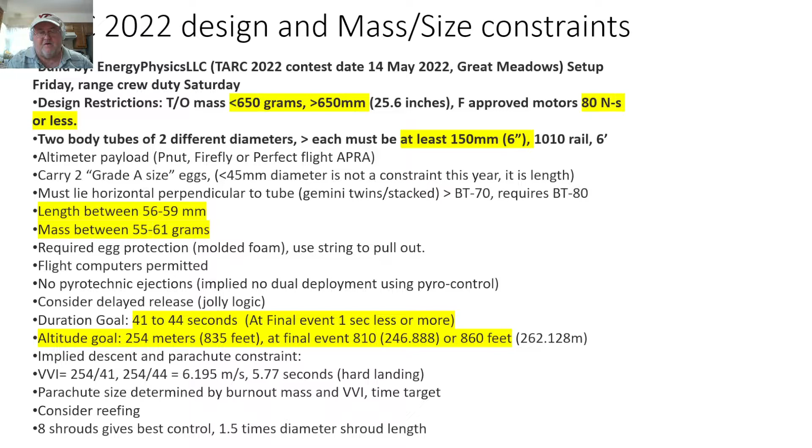Consider reefing your parachute as you dial the altitude in and get the same distance to the ground. I'd recommend using 8 shroud lines, which give you the best control, typically 1.5 times the diameter. This is always a subject for debate, and there are many NAR research papers on this. So look at the NAR websites to see what previous researchers say about how many shrouds and what the length should be - that's typical.

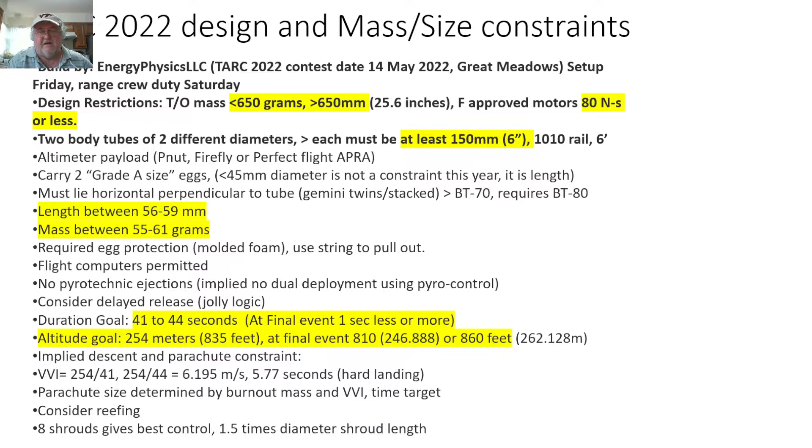So I'm going to base the TARC that I'm building, again for educational and demonstration purposes, off of a project that I did in 1974 at school, in my sophomore year I think, in high school, for the science fair. I think it took 3rd place, which was kind of fun.

Anyway, that rocket was made out of paper towel rolls, and the adapter was hand carved so that I could get down to a BT-55 payload, which carried at that time a Transroc electronics receiver, which transmitted the rocket's position.

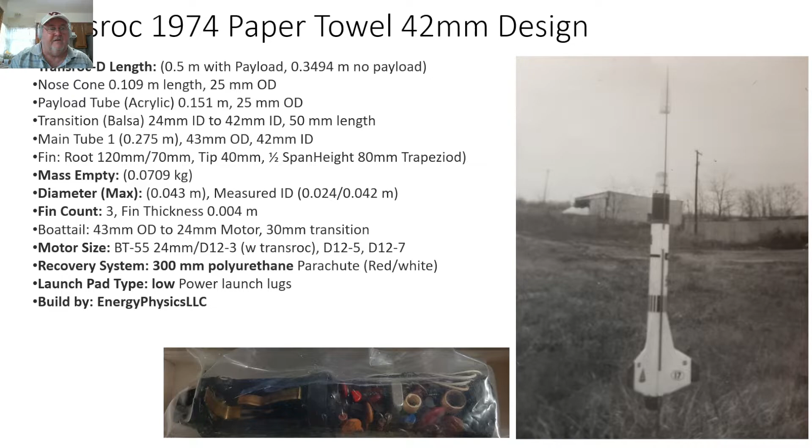The state-of-the-art available, the equivalent of your flight computer today. We just didn't have as much information, guidance, or teachers that could help us be mentors in how to do all that. Just kind of had to entirely figure it out.

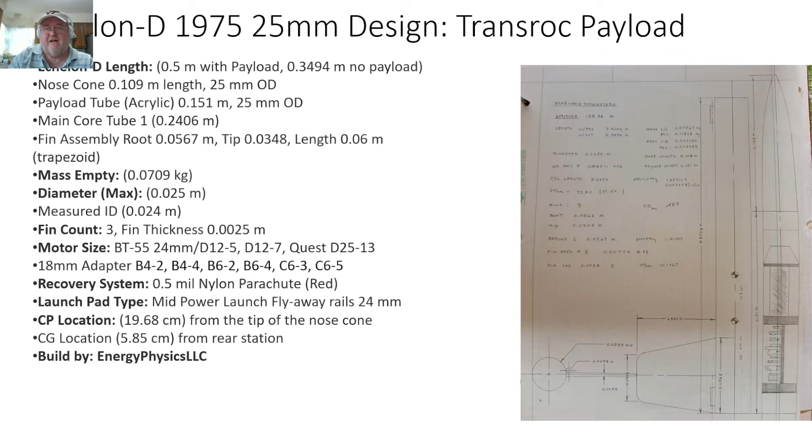So the second system that I based today's design on was the second one I did of this series, the Transroc series, which the Echelon-D I designed in 1975. That was for a higher altitude, 25 millimeter, again carrying a Transroc payload. I never built this because at the time I was entering Virginia Tech, 75 was my last high school. So I took this information and computed rocket altitude calculations and did a whole series of calculations and mathematics that helped me hone my aerospace engineering, determine the drag, the CD coefficients, all that.

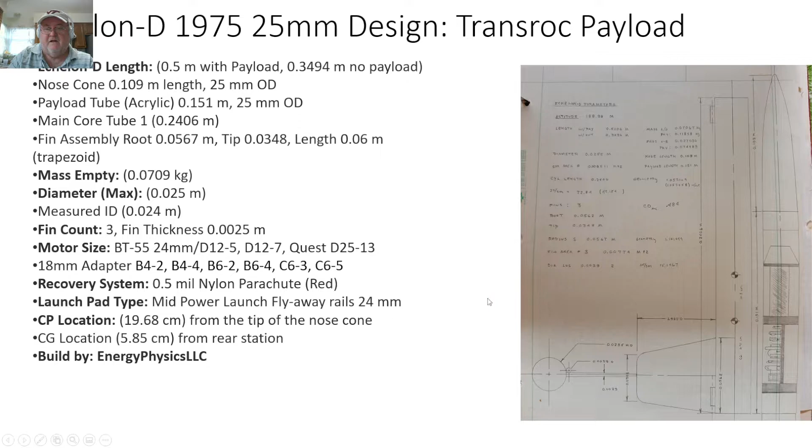Senior in high school, that's when I went to science fair, modeling a spacecraft recovery. Again, I didn't have a lot of help except for my teacher, Mary Hayes, professor. She really encouraged me.

So let's get up to date here. I would recommend that you first look at your overall constraints and put those into a modeling system. Either use Fusion 360, or I'd recommend that you use an online version of SolidWorks, which is Onshape. Then put your basic rocket components into that. The reason you're going to do that is not only to get an assessment of how the components fit together and the sizes and shapes that you're going to use that will equate to stuff that you can buy as an independent parts kit, but you may want to then PLA print or laser cut these components once you're done. This is the modeling system you're going to have in order to make the 3D printing or the laser cutting possible. So go ahead and get your modeling done first.

There are 2 ways to attack this problem. One is you could just go out and grab a bunch of kit material, throw it together with the basics of what you know, and go out and fly it right away. Iterate through that process, hit and miss until you get the right altitude and right engine selection. I would personally recommend that you go ahead and do that right away, just build one and fly it. But once you've done that and learned from those mistakes, hopefully you'll come back and realize that a design process is far more important.

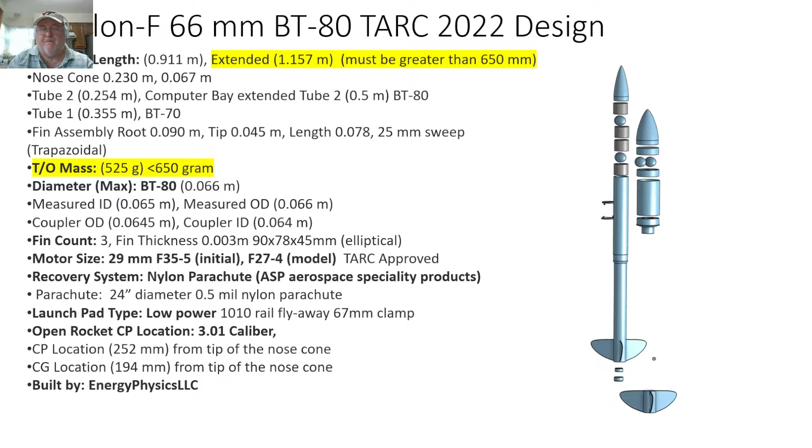The next thing you should do is a real quick simulation to test and determine your motor sizes. A typical tool for this that's free is called Open Rocket, and I recommend you download that. Also buy a commercial version of that from Apogee Components called RockSim. Both systems, in my opinion, are extremely powerful and allow you to do basically everything you need to do: what size engines you need, what your weight is going to be, how long the rocket is - all these basic parameters that you can mix and match and change before you even do a single bit of gluing or shaping or cutting.

Designing is really important at this stage to look at all your options, basically to bound the kind of rocket you're building. You can see from this particular design I've shortened the components from the original Onshape model, just to see how short and how small I could build one of these rockets. Again, I chose a 29mm tube and then another version with a 24mm tube. Each of those required different engines and went to the same altitude, 254 meters. You just keep adjusting the mass balance that you put up front until you hit that altitude, and you hit those numbers in terms of durations and parachute sizes. It's just a modeling iteration process, typically.

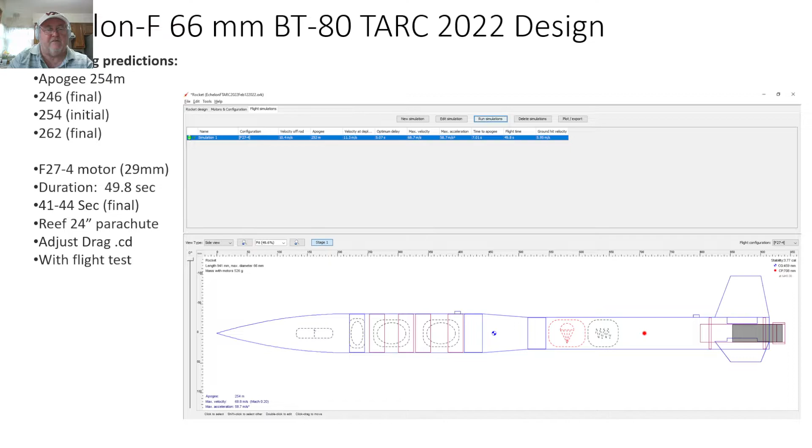This is a printout of that, showing basically your altitude, your vertical velocity, and your acceleration, and other components based on what you're looking at, like how much wind drift you have. I make a recommendation that you look at wind. One of the key factors in loss of TARC rockets is putting them up so high and then dealing with high winds, and then you lose sight of your rocket. It just goes out of sight and hangs up in the trees. So you need to calculate those wind drifts and estimate how far it's going to drift every launch. You can use this simulation to do that. That way you'll increase your chances of recovering it, since losing it is really a financial loss - it's not a safety issue as much as a loss of time and money to not be able to recover the rocket.

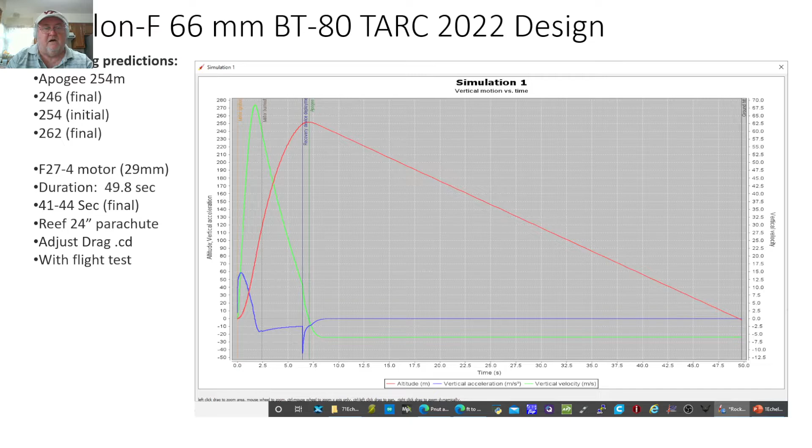This is another style that you'll see a lot, with a bullet nose cone and even the soft TARC-type nose cone. It's a foam nose cone to give it some cushioning, because the nose cone is going to be the first thing likely to hit the ground based on how you've set up your shock cord recovery. Also with a 29 millimeter motor, an F27-4 is what turns out to be the type of motor needed to hit exactly the target.

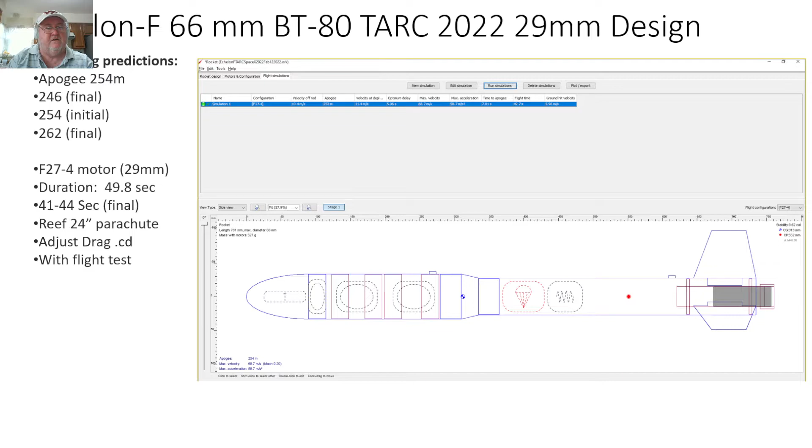And another picture of that altitude prediction. Then a couple changes - in this case, going down to a 24 millimeter motor makes it a little bit lighter and cheaper. So don't be hesitant to go down to a 24 millimeter design, because you can get more launches. Motors are cheaper and they still reach the same altitudes and the same durations. So that's, again, a design decision that you and your whole team need to make. Team meeting.

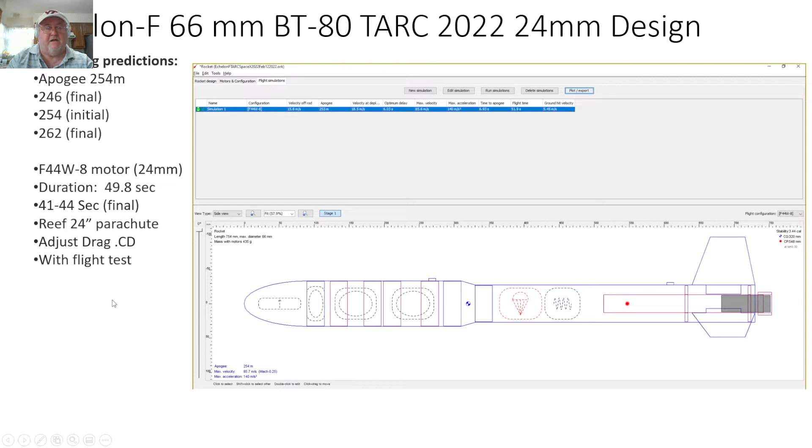So just one quick review - last year's designs were typically like this. They were all either BT-70 tube sizes or BT-80 tube sizes. Those tend to be the two most popular. And they only had to carry one egg, and it was a vertical egg. I just want to caution you, don't order that vertical egg container from Apogee Components - make sure you get the horizontal one instead. So be careful about which one you get, so you don't get the wrong one.

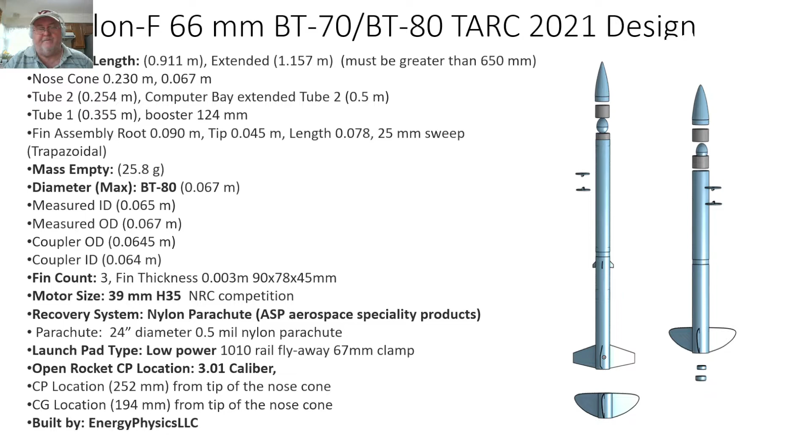These are the 2021 design parameters. Let's just go through them quickly. So let's talk about fins for a second.

Basically, you can still use balsa as long as you strengthen it a little bit and make a fit through the tube fin tab design. It'll probably need to be somewhere between 3 and 4 millimeters in thickness. You want to use either wood glues, which work real good with balsa and paper, or even epoxy, which I'd usually recommend as a stronger material, especially if you change to a fiberglass fin or laser cut your fin.

Typically, using a through-the-fin type of design is better. It stands up to the motor stress and it'll last longer. I usually recommend coming up with innovative ways of making these fins removable. A removable component allows you to replace broken parts, less stress on the rocket, carrying fewer components, and quicker turnaround.

One way to do that is to PLA print a fin container, or fin can, which is a smaller tube that goes outside the body tube. Then you PLA print various fin holders and even pop rivet those, or use cap nut screws, bolts, whatever attachment you want. Or again, you can just glue them and cut off any that break.

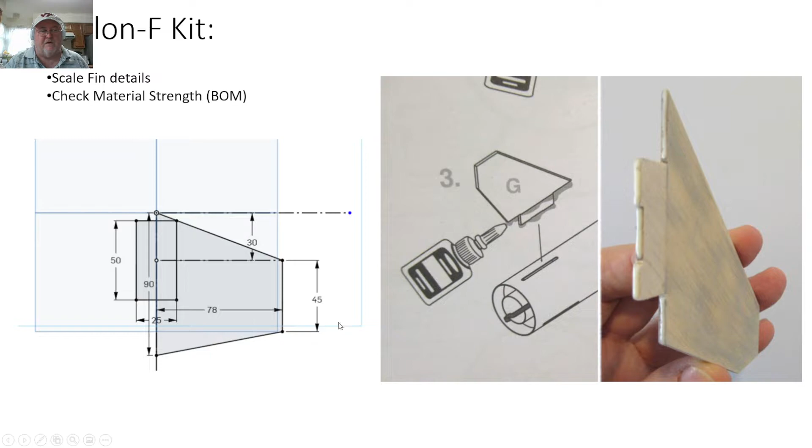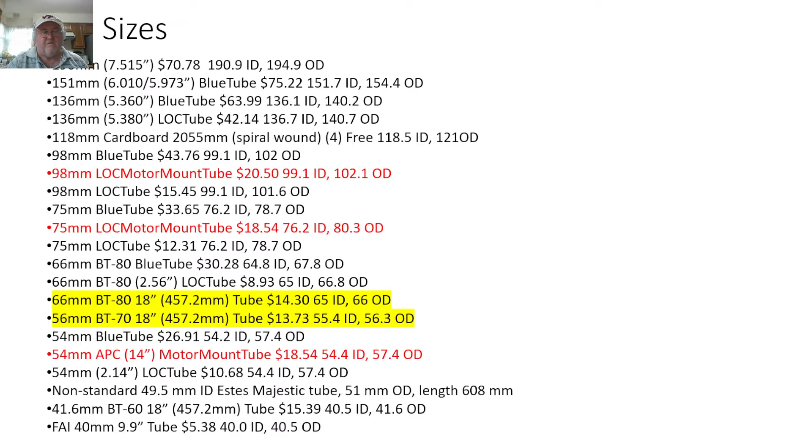Once you have your designs and simulations done, start sourcing out various body tubes and costs. Put all that into a list. Don't buy it right away, just make a big list of all the stuff you have, and make a source list of who you can buy it from and what it's going to cost.

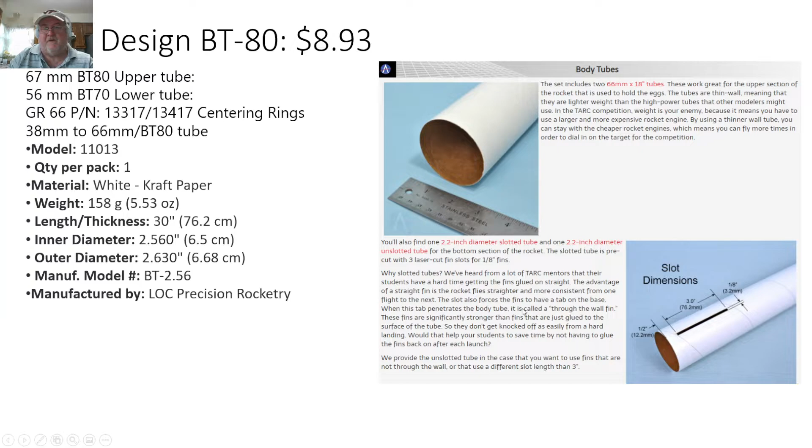You're going to have to do this with a real job, and the process is important. Put that in your marketing video and explain how you went through all that. That impresses the judges, they understand you're doing this as if you were doing a real job at SpaceX, ULA, Rocketdyne, or Electron. So I highly recommend you document your process, costs, and expenditures, how you ordered and who you ordered from.

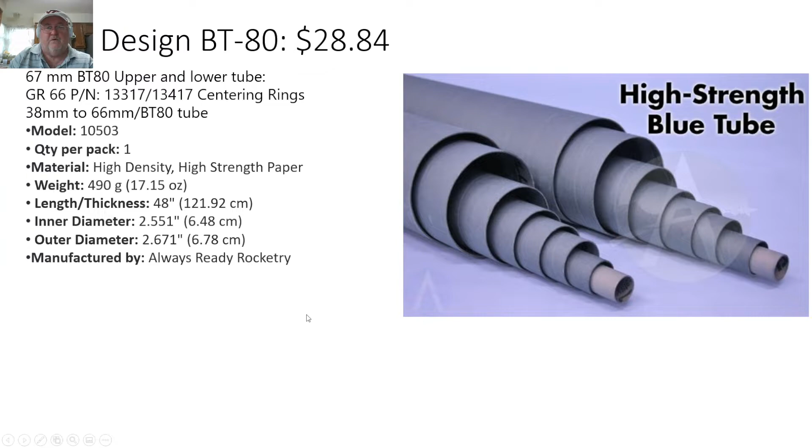Body tubes are important because they determine the strength of the rocket. You can use fiberglass, but cardboard or phenolic tubes work just fine as well.

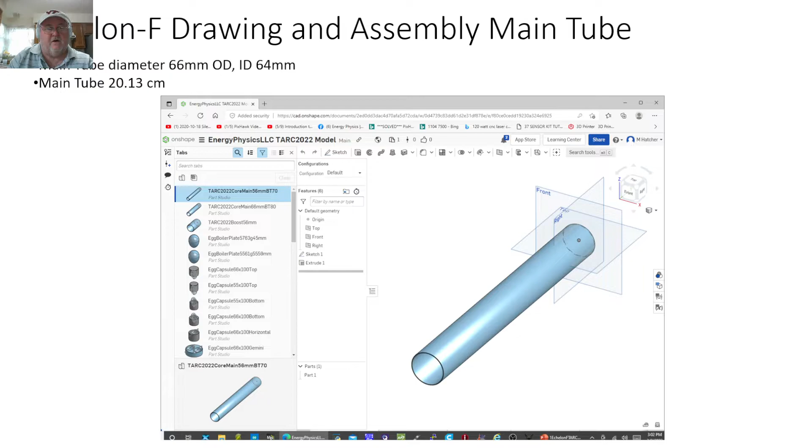Once you've decided on the overall design, go back and change your model so that you can do the CNC cutting or laser cutting of anything, especially motor mounts, tubes, capsules, or special cut bulkheads that you can CNC later.

Each of the couplers is important. It depends on how you want to separate your rocket, whether you have a solid coupler or an open coupler. Again, it's a design decision to make. Considering you only have a certain amount of ejection charge, the longer that tube is, the harder it is to pressurize all that volume. But typically, a smaller rocket is better than a longer, higher volume rocket with an open tube.

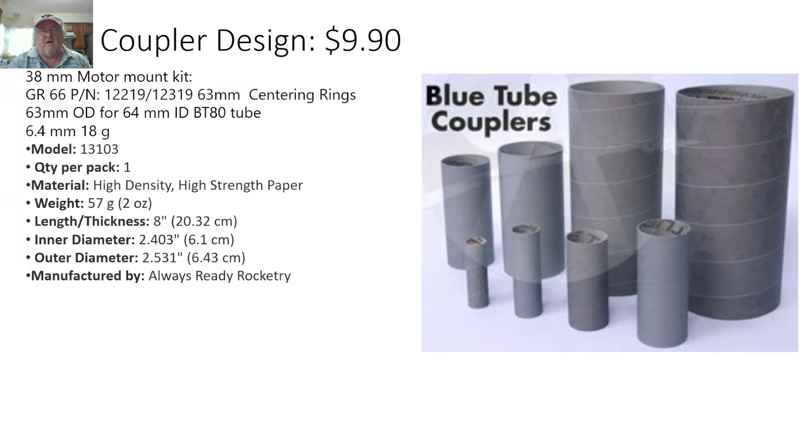Another way to close that down is to use a solid tube coupler that you can purchase, or you can PLA print your own. I recommend that, because you'll learn more if you learn to PLA print your own materials and do your own design.

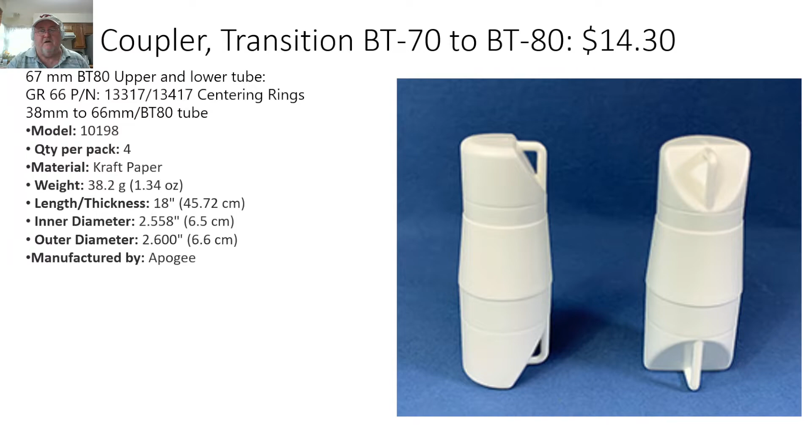Typically, the rockets built by level 1, level 2, and level 3 rocket certifications use hobby plywood just for strength. But if you combine fiberglass and PLA together in a layered approach, you can typically get even better strength-to-weight ratios, because plywood is just glued. You can use carbon fiber and layer, or fiberglass and layer with epoxy, putting a thin layer of plywood, foam, or PLA printed material, whatever layers you want, as you get more sophisticated in how you build these electronics bays, couplers, and fins.

You can purchase these bulkhead designs, and I recommend you take a look at piston ejection systems that prevent you from burning up your electronics. That's one way to do it. Another is burn cloth, a Nomex cloth that you wrap around your parachute, as another recovery system.

Take a look at multiple ways of recovering the rocket and preventing the ejection charge from burning essential components. After a while, catastrophic burns and catastrophic failures occur. Things get heated up, and you'll find that your rocket will last maybe 10 to 15 launches before things start falling apart or breaking.

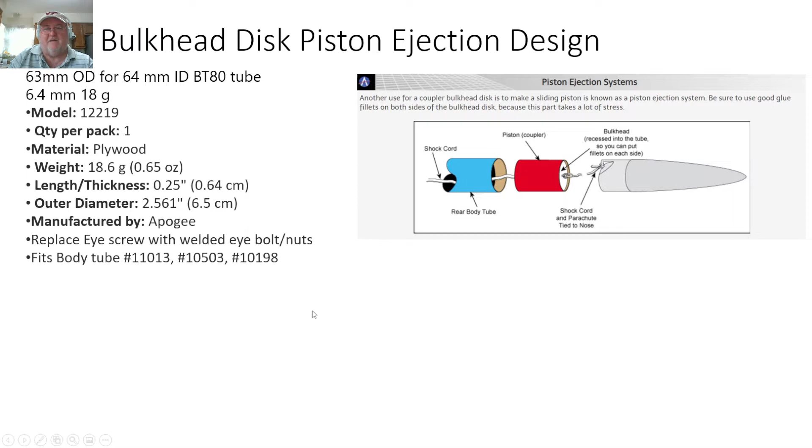These are pretty common design issues, how to make the parts replaceable and the cheapest.

Take a look at your engine tubes, do a 29mm design tube, and the big issue is how do you want to do motor mounts or your centering rings. Again, you can PLA print those, use fiberglass, or wood plywood that's CNC laser cut.

Or you can purchase them. Quickest way.

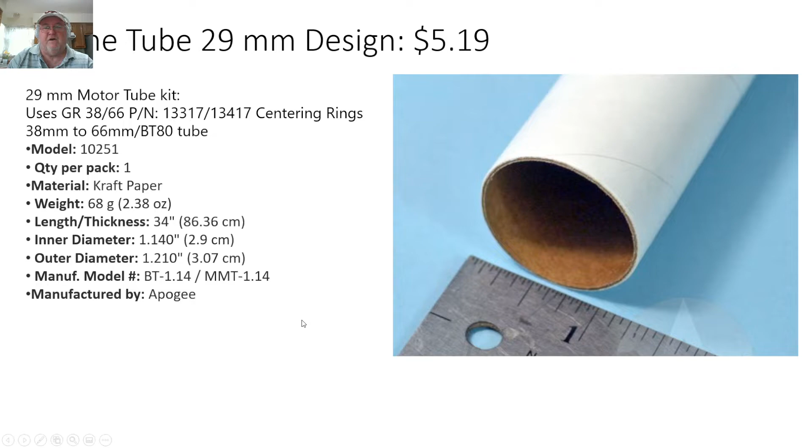It's a decision, but I highly recommend that you use these engine retainers for most of the composite type tube engines. There'll be a little ring on the end of it, or a little bulkhead that you just push up against. You don't have to have an engine retainer on the inside, which is an older style design. Just make sure you've got a strong retainer on the outside of a composite engine typically, and then cover that with a retainer that you typically want to purchase. Make sure the retainers match the tube sizes you're using, the motor tubes, because they are slightly different depending on your source and thickness of the motor tube.

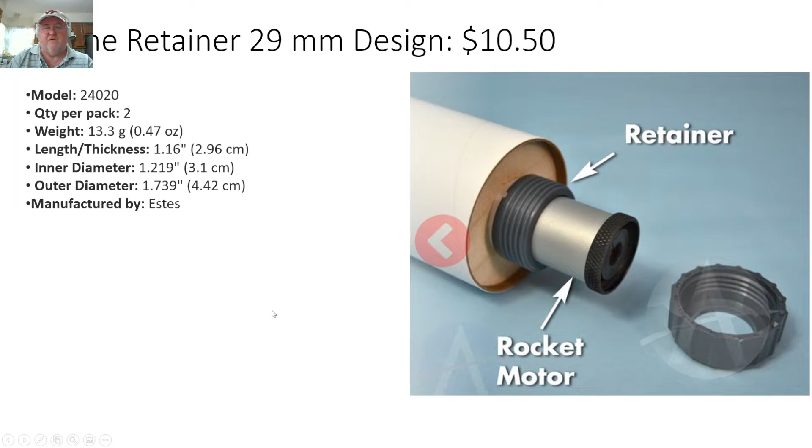Again, I recommend you take the extra time to design your own motor mounts and PLA print them. At that point, you can even put set screws or cap screws in them, and make them removable.

Just make sure you do the stress testing and the ground testing in terms of how strong those are. Actually do a ground test of a real engine with your motor mount and see if it blows through. You don't want to have a blow through when you go out and do your first test and then it blows everything out of the rocket.

Failure simply happens because your internal materials aren't strong enough, your glue wasn't strong enough, or the materials bonding the inside of the body tube wasn't strong. This is a real problem when you go up through level 1, level 2, level 3 certifications with these higher powered motors and launch to thousands of feet. One of the reasons why we restrict you to level F motors is because the stress on the components is not as high and it's a lot more forgiving.

If under-designed or under-glued, components can fail, and this does, believe it or not, happen a lot. Some of the first launches that come up, they just blow apart or come apart. It's because of limited gluing or lack of knowledge in how to build the interior components.

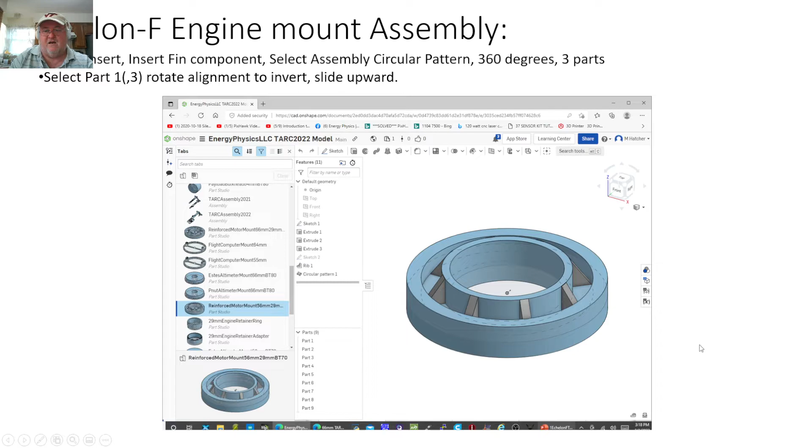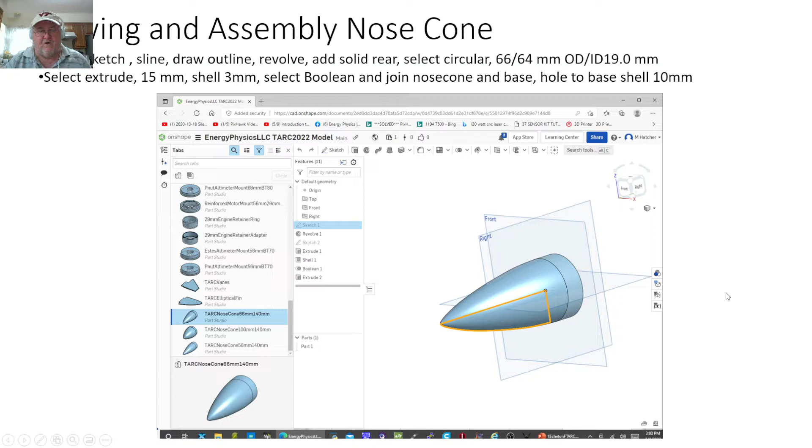You can also buy your own polystyrene. It's a little heavier, but weight and mass don't matter as long as you stay under 650 grams. So you can have a number of solutions that hit those altitudes with varying masses. You're going to use mass balance anyway, so it's not critical to have the lightest possible mass components. Just use whatever works best for you and whatever seems easiest to build and source.

Or again, you're going down that learning curve where you want to build all your own stuff, PLA print your own pins and everything. Go ahead and do that as a learning curve for the team. It also impresses the judges when you make the marketing video—here's how we built it, here's the process, here's why we did it, and how everybody participated. Everybody had some skill set.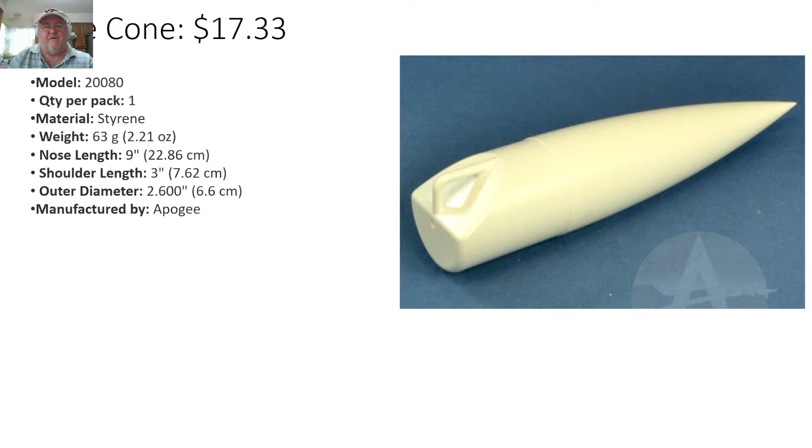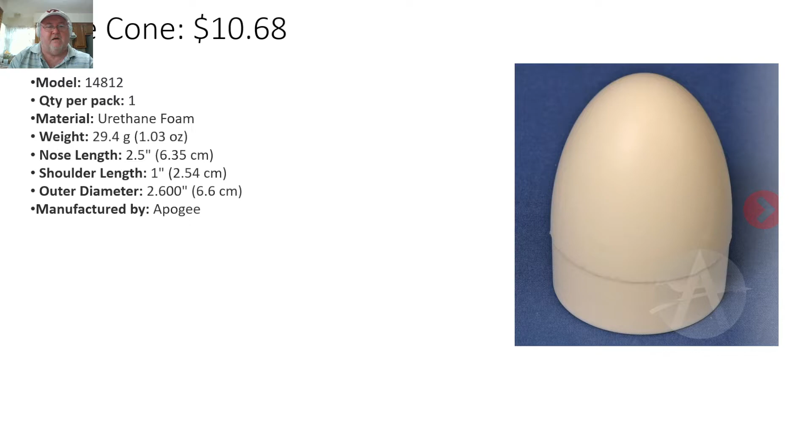You also have an option to get a foam nose cone. Again, this will help soften and cushion your egg. That comes with Apogee components and sells for $10. So go ahead and try that if you want.

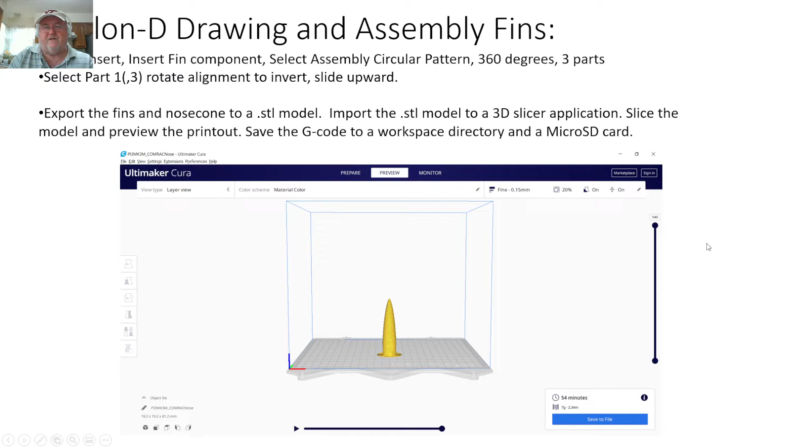Or again, print your own on a PLA printer. I use a tool set called Ultimaker Cura. There are 3 or 4 others out there with 3D slicer capabilities. Eventually you get a G-code put onto a micro SD card, and that's what you put into your printer.

Do the fins as well—not too hard to do. Just sketch that out using pins and lines and things like that, and extrude and fillet the fins as you finish them up. Then you can also 3D print those.

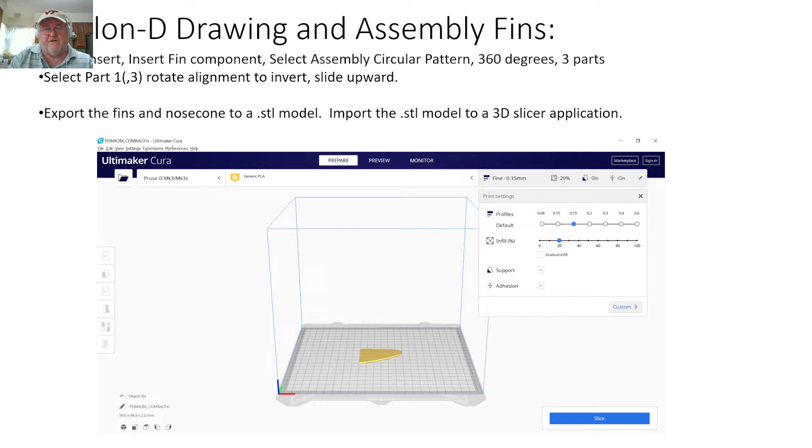You can get them into the model, or you can CNC laser cut them, depending on your approach. For that you need to turn it into a DXF type of 2-dimensional drawing, AutoCAD type format, and use a tool called RDWorks version 8, which is a typical CNC laser cutting tool that you could probably find at a local maker shop.

If you're lucky enough to have a maker lab like Nova Labs, for example in Northern Virginia, that's a great place, or use a university lab, but you'll have to sign up. Just ask your mentors or your school where you can get access.

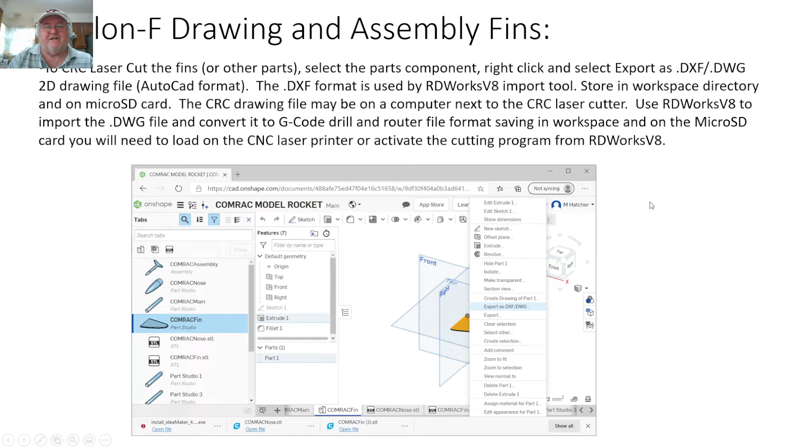This is the RDWorks tool version to get the elliptical fin in. Then we set the laser cutting parameters, which is pretty much the speed and the engraving. The min and max powers are very essential, and they're set up based on the burn distance. That's all standardized and usually in a chart next to the CNC.

For cutting all the way through plywood or different types of plastic, just be careful that you don't cut plastics that cause dangerous toxic vapors. Very, very important consideration for laser cutting—don't cut the wrong plastics.

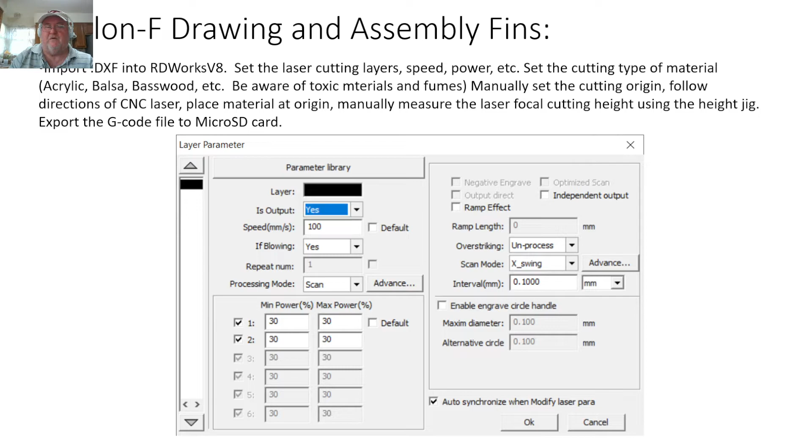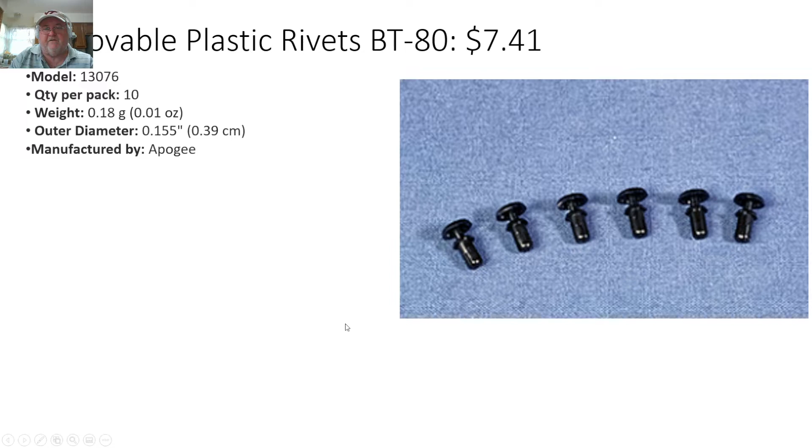Typically it's acrylics. You want to consider using plastic rivets on your BT-80—instead of gluing everything, you'll be able to remove stuff a little easier and get to it if you need to. Do the same thing with your rail button designs. I'd highly recommend that you get rail buttons from the industry instead of making your own, since the ones you buy are typically stronger and made out of better plastic.

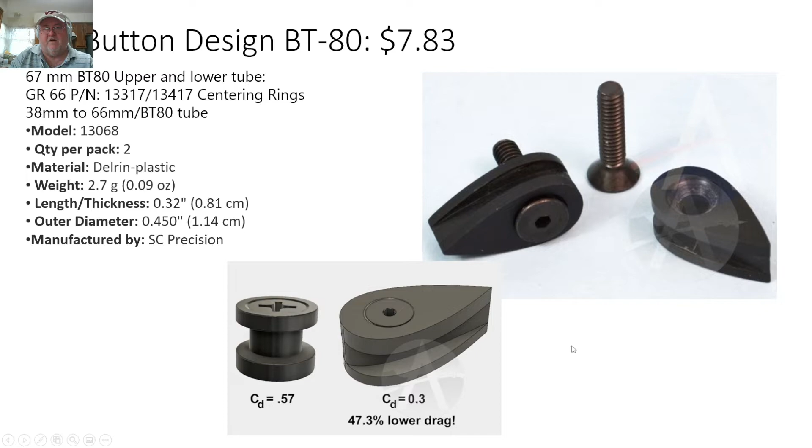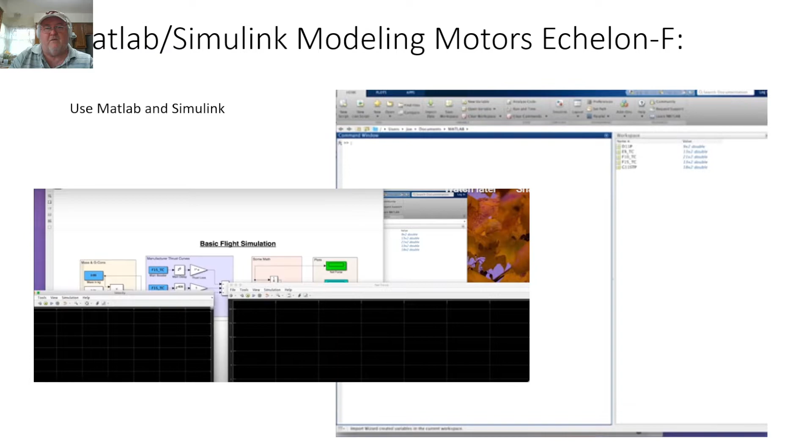Add up all your rocket masses, do an analysis of your initial liftoff weights and masses, and then if you have time, put all that into MATLAB and Simulink and model your motors to get a good set of printouts on the vibrations and the dynamics of the system. You do a lot with control theory. In this case, TARC is all about learning to use the tools that are used in real rockets. MATLAB and Simulink are very important control theory tools that you should probably learn to use by the time you get to college, but it doesn't hurt to start learning some of these concepts now.

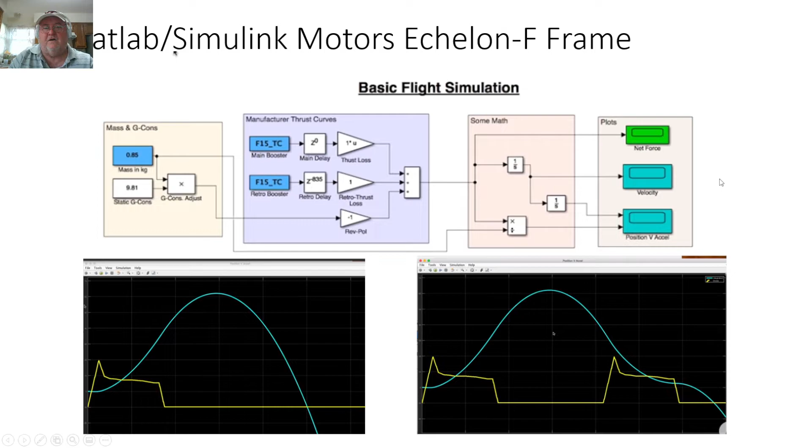You're going to need at least one smart person in every group if you can, or learn this stuff yourself. Assign that task to an individual who has a high interest in control theory, and your entire team will benefit from going through that.

Consider all different types of materials. You can use ultracoats, monocoats typically used in airplanes, carbon fibers, glass epoxies, carbon sheets. If you're using epoxy to build up your own fiberglass, you've got to have peel ply and soft coats and absorbents for the excess epoxy, and you're going to need a vacuum bag.

Good bubbleless design—again, all kinds of ABS, PLA, PETG types of PLA printing materials. You're going to have your different drill guides and cutouts, different motors, and of course your horizontal egg payloads are going to be foam. I'd recommend always using M3, 3-millimeter mounting screws, maybe 3.5, but at least 3mm cap nut screws.

With you can tap your own 3mm holes with a tap and drill set, or possibly purchase little inserts that melt down into the material using a hot soldering iron. Again, you may consider plywood or foam surfaces. Foam is very lightweight, so some of that between two fiberglass or carbon fiber sheets, forming up the layers.

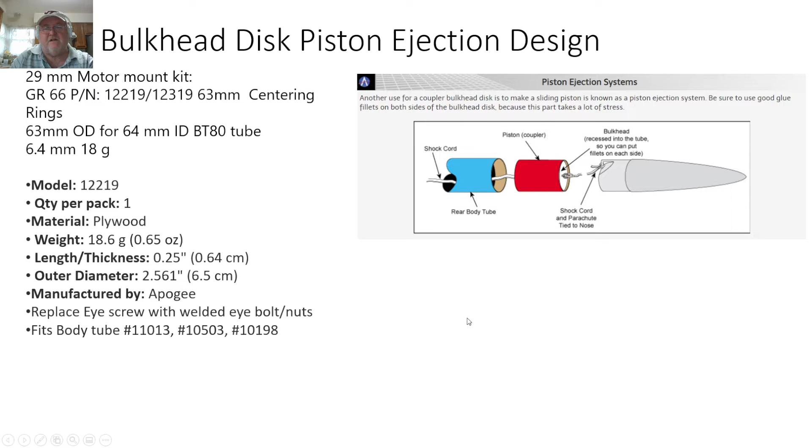The typical piston ejection is done with a piston coupler. You can learn how to do that again from videos, or you can buy them. Think through how you want to deploy.

Again, you don't do any dual deployment in TARC, but you could look at recovery systems that are controlled by your computer that dual deploy. This area is wide open for how you want to deploy parachutes using other than pyrotechnic charges. You can't use any pyrotechnic charges, but you could still use the same design approach using servos controlled with altitude barometers controlled by your flight computer. There's no limit to the number of parachutes you could release at different times or different altitudes, again, depending on imagination and creativity, all in the name of learning how to build something more technical.

This gains you some points in terms of the judges judging your marketing, okay, but it doesn't necessarily help you nail those altitudes anymore, unless you've got it down to a science and can really cut down the altitude release errors and timing errors typically caused by the ejection charges on the motors. The motors and their ejection charges are just not that precise, so you're dealing with a lot of variability no matter what if you're only relying on the ejection charge. So a lot of people are using speed brake systems to offset that, but they still can't predict when that charge goes off.

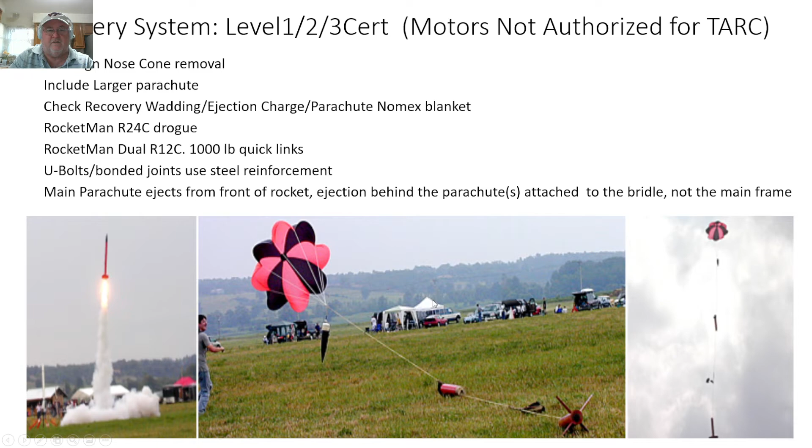Again, you'll see the mistakes that are made. This usually happens in level 3 - things get tangled, things get ejected too fast. You shouldn't have too many problems with that though, it's F-size engines and using the normal systems.

My goal is to go ahead and enter phase 2 of this - the actual build phase. I have all of my components ready, and it's now the first part of March. Building my own system, going to the second phase of these documented videos, which will be the build process, and the third phase between March and April will be the flight testing phase, with a third documented TARC video put out.

Currently I'm looking - again, you have to be somewhere in the 80 Newton-second max allowable range, so I'm looking between 40 and 80 Newton-second engines. Looks like my F-44W8 is a good candidate for a smaller rocket design, and the F-27-4 is a good indicator for the first model design I had. I'm not sure exactly yet which of those two I'm going to go with, and I'll probably test both - more than just one design, more than just one type of rocket.

Looking at your motor testing, again, you can only use the ones that are approved by TARC. Consider putting some design LEDs in it from your flight controller - it always looks cool to have blinking lights. Again, you'll learn a lot. Optimize your motor thrust for the mission, and if you use speed brakes and a flight controller, you can start to nail that, and even consider controlling the thrust.

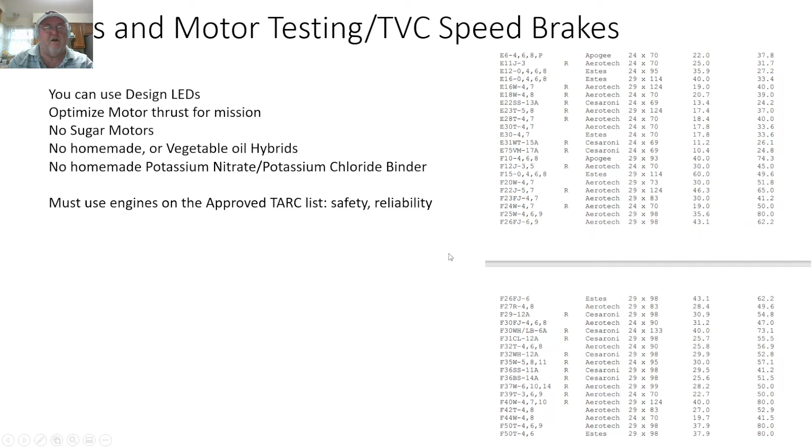I'd recommend that you test your motor if you have time - that just means build yourself a test stand and do a firing. I would fire it in the actual tube if you can, so that you can determine the strength of the materials involved.

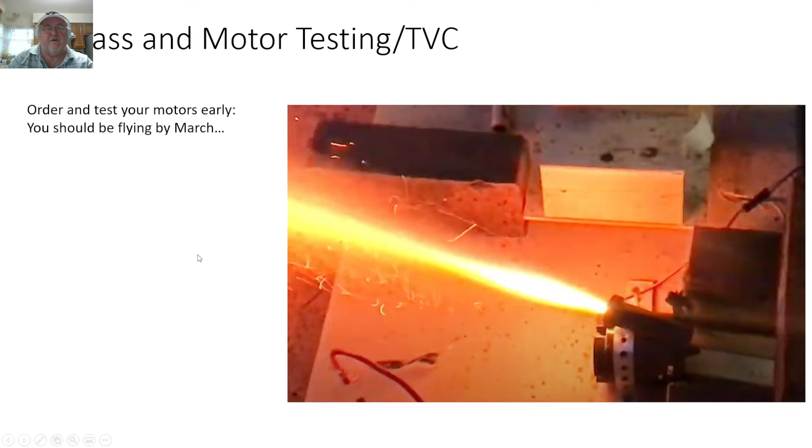Don't forget your igniters - there are special types that you need for these motors. Make sure you order your engines early, because as they get closer and closer to April and May - I think the deadline is end of April for the last qualifying, and the contest is in May, I think the date is the 14th, but don't hold me to that - we'll see you at Great Meadow, hopefully, and you'll have all your engines, and your sponsor or your school will make sure that you have enough.

Don't forget the dual egg payload restrictions are horizontal - this is the apogee version of that foam container, do not buy the vertical version. And remember that you are restricted in terms of grams, weight, and length - 56 millimeters - which means somebody's going to measure those eggs for you. Unfortunately, you have to do it yourself, unless you don't have a mentor or a sponsor who is helping you along.

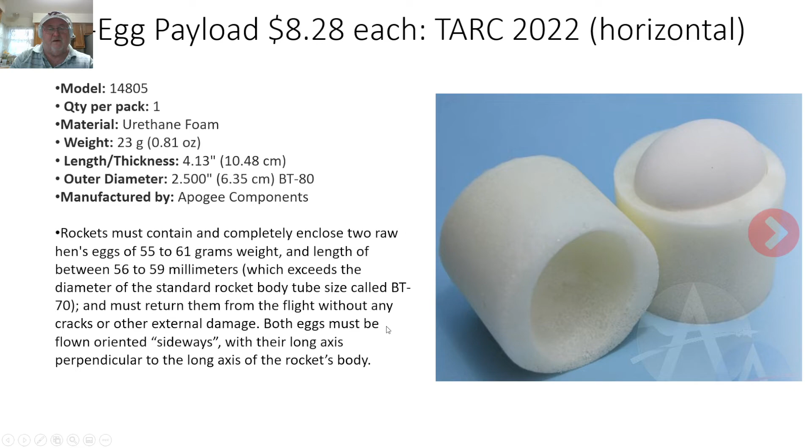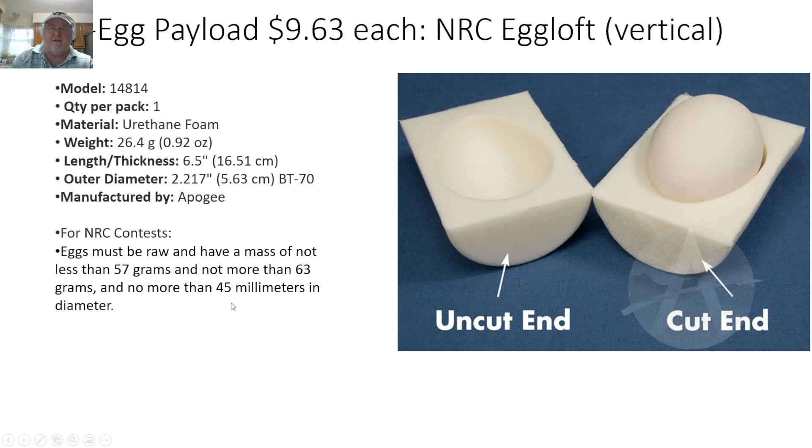They're not allowed to help you build anything, just remember that, so you have to do all this stuff yourself. Again, this is the vertical version. Don't buy this one unless you're doing an NRC contest. Don't want that. Again, electronics, as a minimum, you have to have an altimeter.

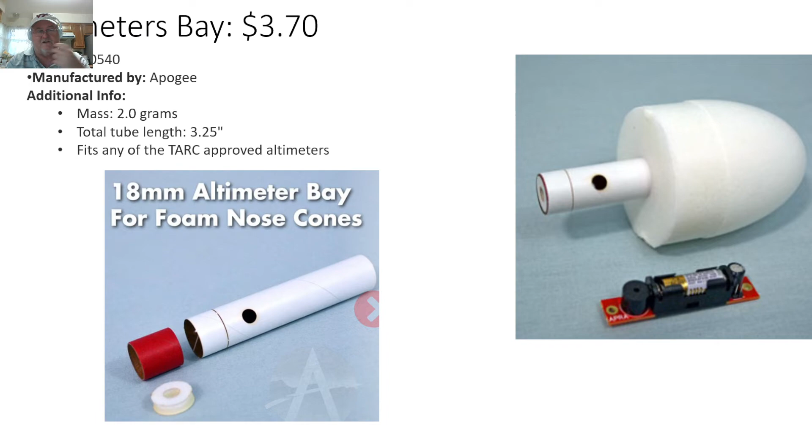This is one way to put the altimeter in, and typically it's one of those 3 approved - it's one of the peanuts. Peanuts are very, very common. Recommend that you figure out how you're going to mount them. You can fly the PerfectFlite Peanut, the PerfectFlite Firefly, or the APRA, which are cheaper versions of the Peanut. And that standardization makes it easy.

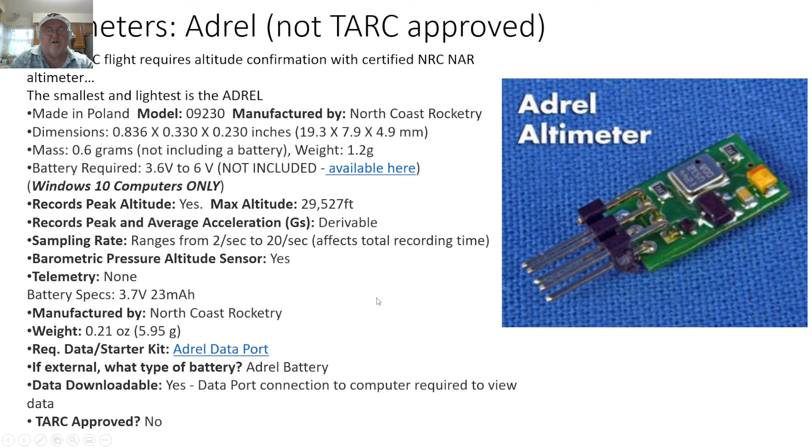If you want to, while you're doing testing, add another altimeter just so you can compare the two. Adrel is a typical system out there that's very, very small and lightweight, and it's typically helps you get the knowledge required for contest rockets, because this is really the lightest weight system out there. It even has dual deployment or ejection capability. Later, in another design with another system, use that. Just note this is not approved for TARC, and deployment or pyrotechnic approaches that the other altimeters use are all for safety. But just take a look at that if you want to add it into your system.

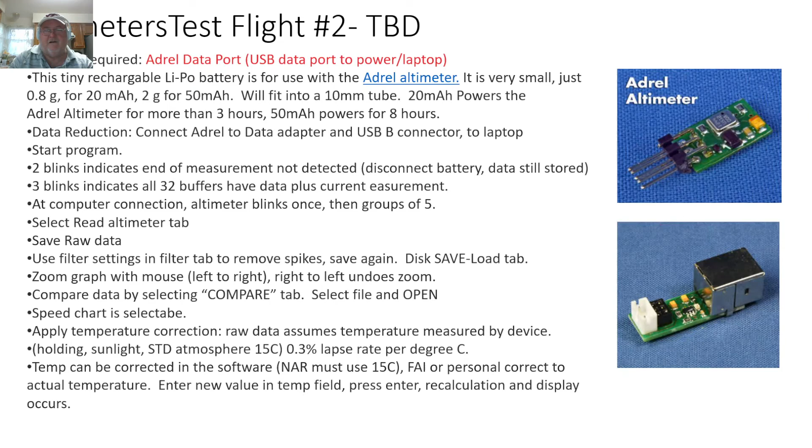I like these Jolly Logics a lot. You can add those in. They're not approved for TARC. Again, you can only use the 3 that are approved.

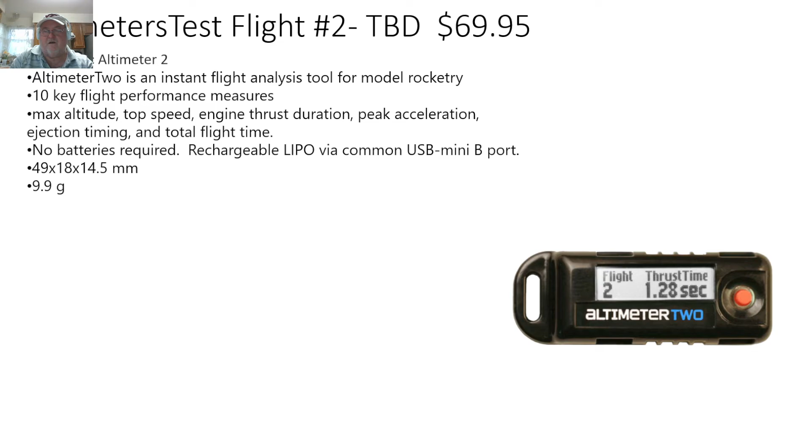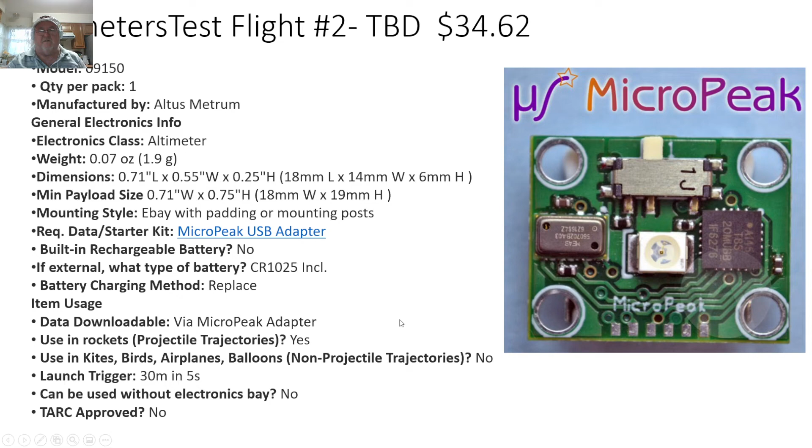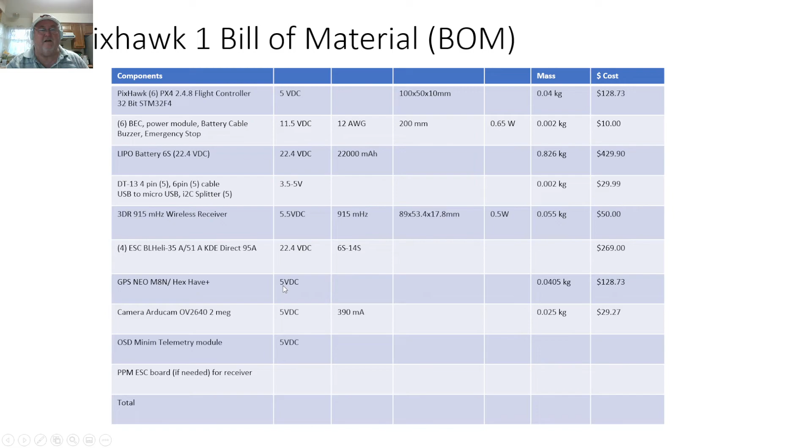But anything that lets you download data into the flight computer and then analyze it, I think is great. So you need to get the versions of either MicroPeak that will download your data, or the Adrel that will download your data, or the version of Jolly Logic that downloads into a computer. And that, I think, is helpful to actually see the altimeter-based profile, unless you have a GPS and altimeter built into your flight controller, which is very possible, and this is the one I use. I use it in a system that is already capable of all this, which is Mission Planner, and to my knowledge, nobody uses it. Wish they did. Nobody that I know of in a rocket did it except for me. So this is my contribution to you.

So you're going to build a flight controller. You don't have to go out to Arduino and do all your programming and code on your own, although you will need to code differently than what's existing in the existing groups, because they're not designed for rockets. These systems were designed for airplanes and designed for drones. So I'm currently coding up the version of the larger rocket project that was started back in 2012 and didn't finish, and got abandoned because they didn't design their code to a design standard that fit well with the whole open source community. So we're going to try to fix that problem, get a decent version of this software for rockets, but you can use the existing software and modify it as long as you don't do any thrust vector control. Use the GPS portion, set the parameters up to align it with servos and fire servos, all that kind of stuff. All works. You have to work with it and do some creative thinking about it.

I personally would do both. Design an Arduino system and do the code, because you'll learn a lot from it. But I'd also take a look at these ArduPilot open source systems, copy it, and go further. Even Joe Barnard is not using this capability. Go further and catch up with the drone and airplane community by using this as an advanced system.

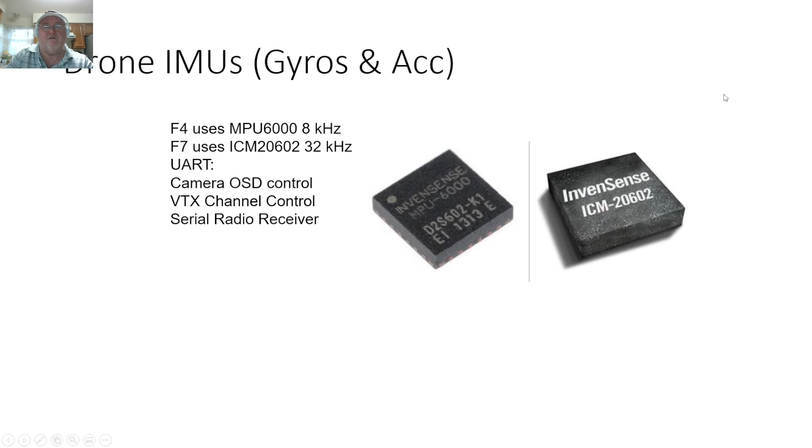Don't forget your bill of materials. Learn a little about your IMUs, gyros, and accelerometers as you go. You can also look at battery systems and what are called BECs, battery elimination circuits, which is basically a voltage regulator. Have that possibly in your system.

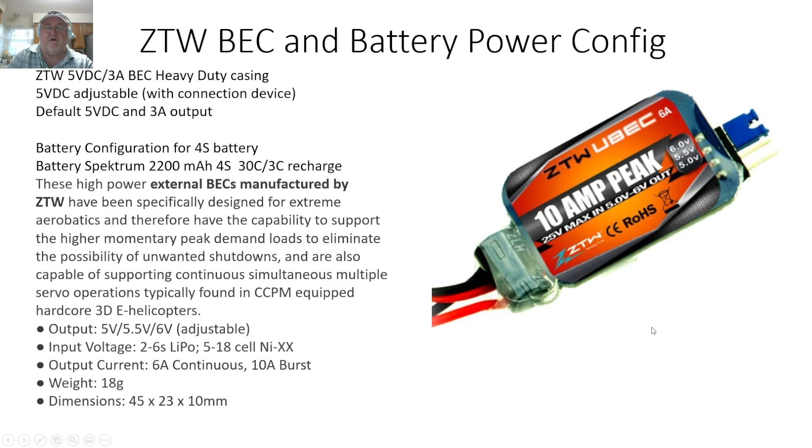Again, all this electronics, I'd recommend you use receivers, transmitters for your servos and controllers, and flip a switch and eject your parachute with that. I think that that's permitted to have that kind of controller. We'll just have to check. The flight computers are committed, are allowed. You just can't have any active flight control. So you can flip a servo, I think, from a transmitter. I'll just have to check with that. Check with the Trip Barber. I don't think they prohibited you from using a receiver system to flip a servo and eject your parachute. I think that would be one system that worked.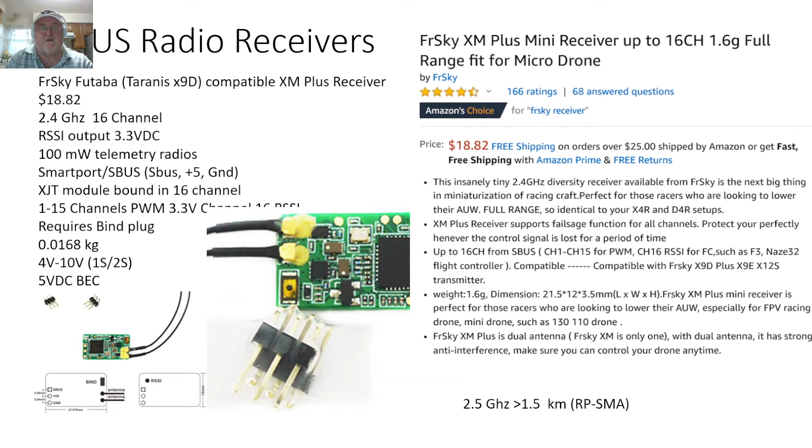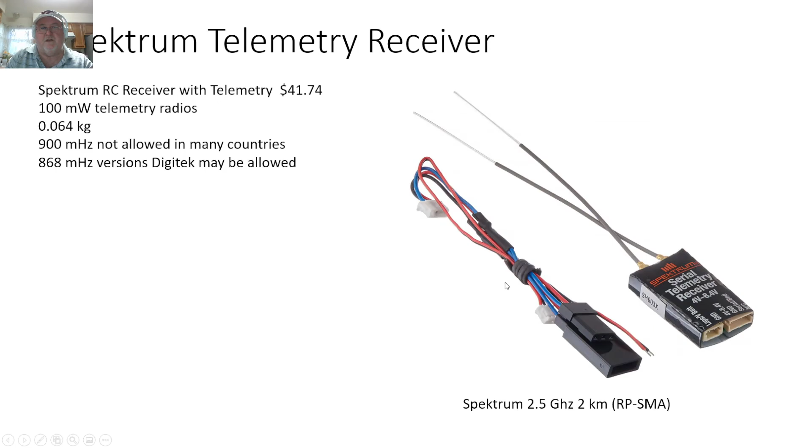You can use S-Bus systems and FrSky type systems, or my favorite, the Spektrum type radios and transceivers. Personally, they're going pretty far into remote, reliable Spektrum satellite controllers. That gets especially into drones, they're really good.

Don't forget, some telemetry radios are necessary to send GPS data back. I'd recommend you consider GPS additions. All this makes your rocket heavier and more complex, but if you're a team that's been building the same stuff year after year for 12 years, you should be at a point where you can start considering telemetry systems, downloading and collecting data.

It won't necessarily help you win because there's some luck involved, but the tighter you can make those tolerances, and the closer you get to the absolutes across repeated launches, the more likely you'll have a chance of winning. The winning teams are typically within 8 to 10, and doing that repeatedly will put you in the top system. So telemetry could really help, as well as keeping statistical data on your altitude in a spreadsheet using statistics.

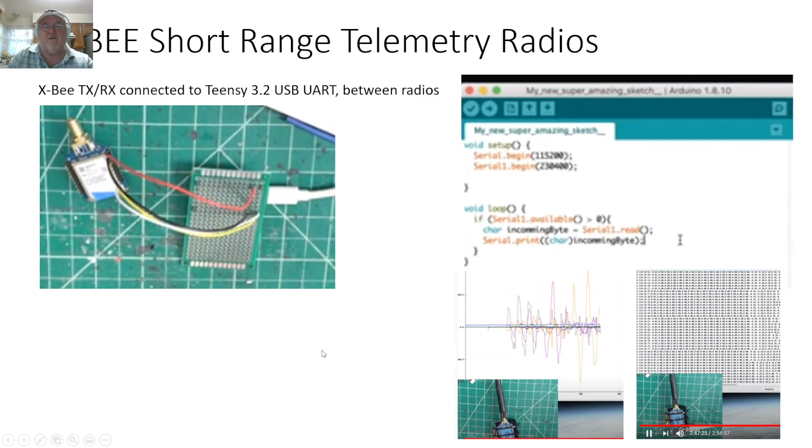Use your short-range telemetry. Here's a number of radios that are available. Pick radios of the 3DR type components, I'd recommend those over all of them. The longer range ones are more expensive - RFD900, very nice, even Dragon Link, but those are heavy. So I'd go back to the SiK 3DR robotics type radios.

Set up an upload system and a download system, hook that up to your GPS, typically through the UART portion. And if you really have time and your team is highly motivated, build yourself a ground station with tracking capability.

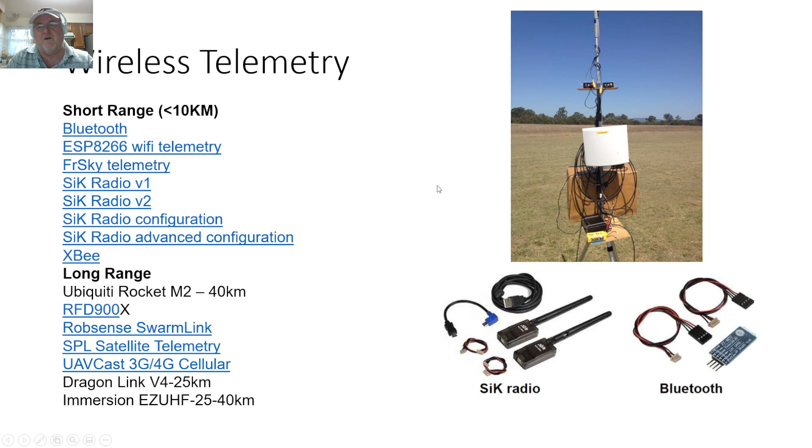There's so many things you can learn, more technology and more capability. If your team is as advanced as some we've seen coming out now, using flight computers, it wouldn't take you a year or so to build these complex ground stations, and if possible, put some cameras in it.

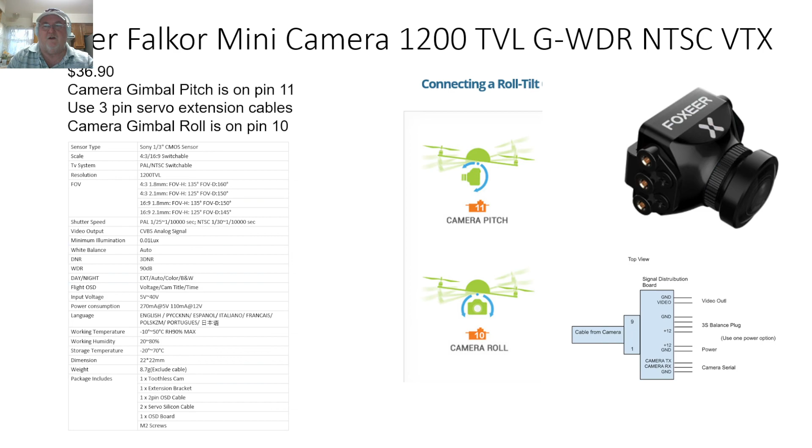These FPV systems are really simple and easy to use. They just require a video transmitter and an OSD, an on-screen display system, and then you need a display, or you can use your VR goggles. Video receivers at 5 gigahertz frequency. Foxeer is a good camera, RunCam's a good camera - there are hundreds of good camera systems.

The last thing I recommend, if you have the capability, is to put a safety switch into the system, especially if you're using a flight computer that could start your motors. You can start a motor from countdown, and all that is possible, but you have to check with the TARC mentors, because there may be rules against firing your own motor with the flight computer. They typically want those fired manually, with the range control RSO person being the only one who can push that safety switch button.

But if you wire up a safety switch to your electronics and battery, and use that to turn it on and off, or insert a safety flag to remove before flight, that really adds to the safety and sophistication of the system.

That's the end of my video. I hope it was enjoyable and educational, and gets you down the road in terms of using your team's maximum capability and ability to think smart, think out of the box, be innovative, and get those processes and design concepts down that the TARC program is built for.

I want you to learn as much as we can, and to do that, do as much research, marketing, and video learning as you can, and really impress those judges by having a well-organized team that works just like a SpaceX team, a Rocketdyne team, or a ULA team.